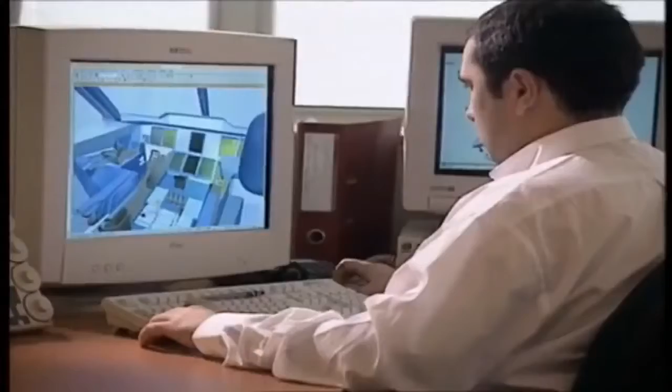It's a mega plane, bigger and heavier than any other passenger plane in the sky. It will hold more people than any commercial jet flying. Designers have spent billions. Now is the moment of truth. Will the world's biggest passenger airliner survive its maiden flight?

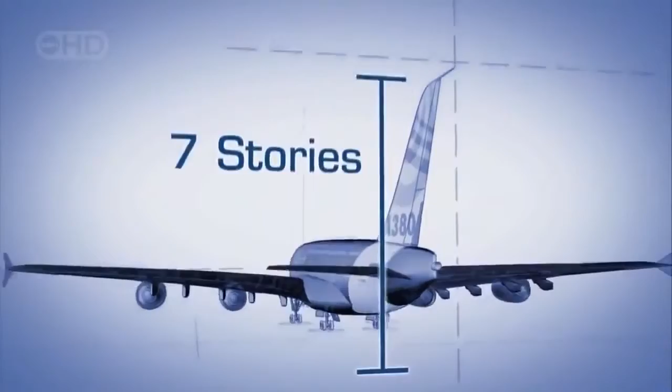An early spring morning, clear skies and a light breeze over southwestern France. Crowding the fields that flank Toulouse International Airport, 40,000 spectators, backpackers, campers and journalists from around the world, all vying for the perfect spot to watch the maiden flight of the Airbus A380, the largest passenger plane ever built. It's 73 meters long, 7 stories tall at the tail, almost 80 meters from wingtip to wingtip, heavier, longer and taller than a 747, with 2 full levels of seating, enough to hold over 550 passengers.

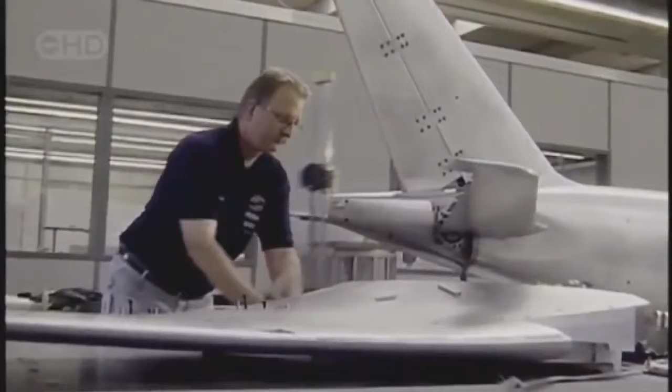Getting this monster off the drawing board required new, super lightweight materials, 4 powerful new mega-sized engines, massive new factories across Europe, and a computerized flight control system more sophisticated than any other in commercial aviation. This moment is the biggest gamble that the company has ever taken. A $12 billion investment, the company's entire future, and the lives of future passengers all ride on the success of this historic test flight.

Alongside the runway, a hush settles over the crowd as the megaplane comes into view. Gradually, it gathers speed, accelerating to reach its takeoff velocity of 269 kilometers per hour. Then, as it nears the end of the runway, the moment of truth. The massive nose tilts skyward. A sliver of daylight appears beneath the rear wheels, and the Airbus A380 takes to the sky for the very first time. The engineers and technicians in the crowd breathe a collective sigh of relief. Their baby is flying.

The question now is, does anyone want a plane this big? Will the unprecedented size prove a boon or a boondoggle? Is this super jumbo the future of commercial aviation? Or the biggest white elephant since Howard Hughes built the Spruce Goose? It all depends on whether Airbus can convince airlines that travelers will want to trust their fates to this flying cruise ship.

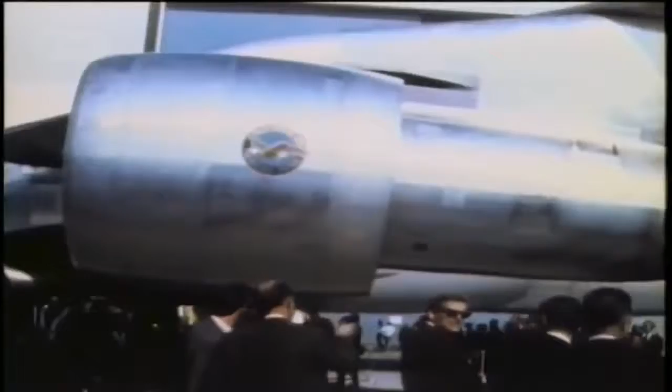1969 was a year of technology firsts. That year saw the arrival of 2 exotic new airliners. Boeing rolled out the 747, the first double-decker passenger plane, larger and heavier than any other. Powered by 4 Pratt & Whitney JT9D engines, providing a total of 186,000 pounds of thrust, the plane had enough power to carry more than 400 passengers and their baggage, more than double the capacity of the 707. The plane wasn't an immediate hit, but eventually, it took off.

That same year, Aerospatiale and British Aircraft Corporation, the precursor to Airbus, introduced the Concorde. While Boeing was bulking up, Europeans were getting small, but very fast. The Concorde traded capacity for speed. The plane carried only 128 passengers, but it could cruise at twice the speed of sound, cutting the trip from New York to London from almost 8 hours to just under 3.5. Both the 747 and the Concorde came to be the epitome of luxury in air travel.

These two differing visions came to symbolize a fierce rivalry between American and European aerospace giants, a rivalry that's only intensified with time, even as the business of air travel has changed dramatically. The Concorde, after years of financial difficulties and a devastating crash in Paris, has been grounded. And the 747 is now an aging workhorse, noted less for style and more for the sheer number of passengers it can pack between its wings.

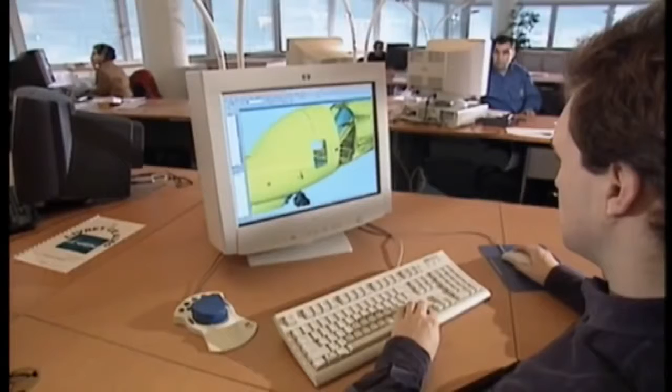Some argued that such a craft would be far too heavy and expensive to be practical. But a tenacious and aptly named Airbus executive, Charles Champion, wouldn't take no for an answer. He encouraged his design team to think outside the box.

Well, there were lots of weird designs. Some looked at the double bubble, a double-wide fuselage. One of their first ideas, it looked promising, but computer analysis showed that it would be far too heavy and not sufficiently aerodynamic.

So Champion sent his team back to the drawing board, and eventually they came up with this history-making concept: a full-length, double-decker passenger cabin, with a third deck below for cargo. Space-wise, it's the equivalent of 2 complete wide-body cabins, one on top of the other.

The new plan called for an aircraft only 2.5 meters longer than Boeing's 747. It was 15 meters wider and 5 meters taller.

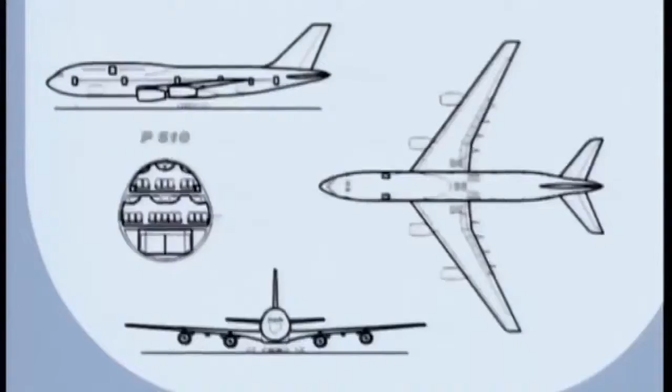But when they ran the design figures through the computer, they had a shock. The plane was far too heavy. We came up with horrid figures, saying, my God, this is the weight of the aircraft, it doesn't work.

So what we did immediately at the launch of the program, or 2-3 months afterwards, we launched a very strong challenge on the weight. The team set out to bring the base weight of the aircraft below 277 tons. That's only about 50% heavier than the 747.

An ambitious goal for a plane designed to carry over 100 more passengers and their luggage halfway around the world. Unless Champion and his engineers could find the means to beat that target, the dream would die.

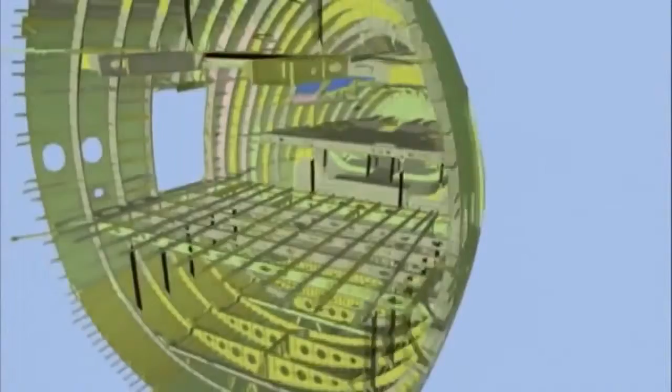Airbus engineers were faced with a design challenge that called for a lightweight plane carrying over 550 passengers at a lower cost per seat, not to mention quieter and less polluting than anything in the air. The design team knew they would have to rethink everything.

They needed lighter materials, more powerful engines, larger wings, even bigger and smarter factories. Every component would have to be scaled up from supersize to mega size.

But even while the engineers were still scratching their heads over the details, the Airbus sales force was already hard at work, seducing customers with visions of the future.

They created a full-sized interior mock-up that promised passengers in coach some relief from the grind of travel, with seats an inch wider than in other planes, and overhead bins 10% larger.

Each plane can also feature a new interior illumination scheme to eliminate the upsetting effect created when flight attendants suddenly switch on overhead lights. The kinder, gentler system in the A380 mimics the gradual transition from day to night and back to daytime again.

These and other innovations make the plane distinctive, but it's the promise of opulent luxury that really turns heads. To help build excitement, computer programmers constructed a virtual showroom where airlines can bring to life their wildest design fantasies.

Ladies and gentlemen, this is your captain speaking. I'd like to welcome you on board this 3D tutorial for the A380 main deck door.

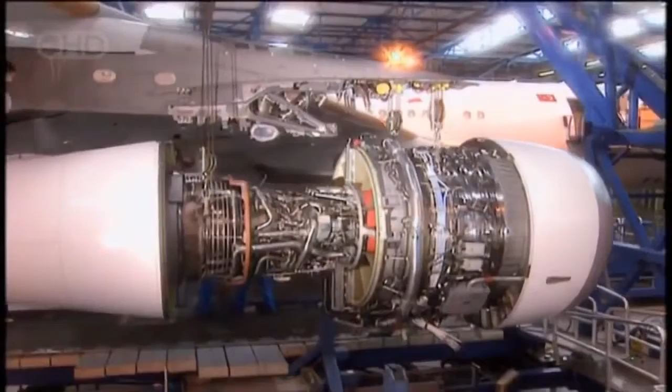For power, they would buy engines built by Rolls-Royce, capable of providing 30% more thrust than the engines used on the 747. Each massive power plant cost $15 million, as much as a ton of gold. Altogether, they account for almost 25% of the cost of the entire plane.

If there's one thing this aircraft needs, it's thrust that won't quit. Each engine provides up to 80,000 pounds of force. Running at top speed, this mega guzzler sucks down a litre of fuel every second.

The A380 is designed for routine flights lasting 13 hours or more. That means when it's fully tanked for takeoff, the A380 carries a lot of fuel—260,000 litres, 20% more than the load carried by the 747.

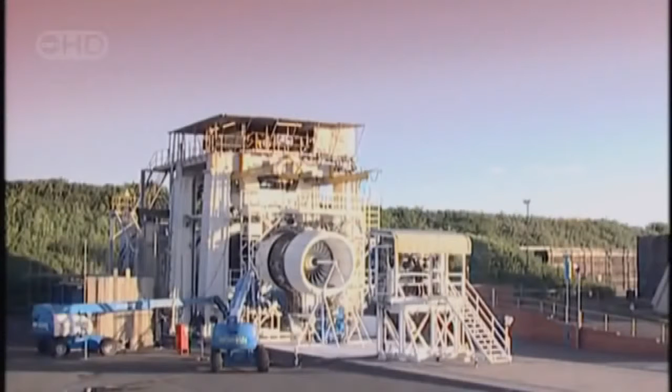Just imagine what would happen if anything threatened the integrity of one of those fuel tanks, like a catastrophic engine failure that sends shards of metal tearing through them. That's the nightmare that haunts engineers at Rolls-Royce, and they're about to destroy an engine to make sure it never occurs.

These 24 titanium fan blades suck air into the maw of this A380 engine. Each blade is 1 meter in length and weighs 15 kilograms—lightweight, but super strong.

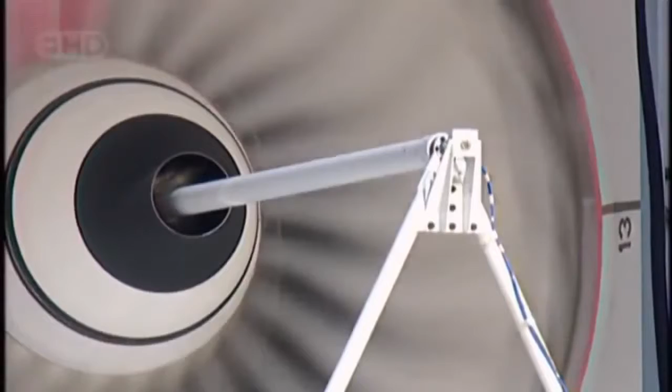When the engine is roaring along at full throttle, the blades spin at almost 3,000 revolutions per minute. The centrifugal force at the tip of each blade is equivalent to the weight of a 110-ton locomotive. If one of these were to break off and escape into the engine, it could wreak unimaginable destruction to the plane.

That's why Rolls-Royce engineers are about to conduct an engine failure test. They're going to intentionally cause one of the fan blades to break off at full speed in order to prove that the engine enclosure can contain the damage without letting any metallic fragments escape.

In the process, they will totally trash this $15 million engineering marvel, a small price to pay when the lives of over 550 people could be at stake.

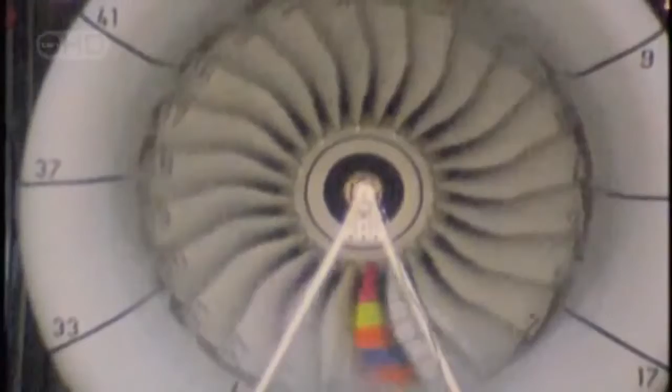A super slow-motion camera captures every moment in excruciating detail. The blades are striped to make visual measurement easier. When the fan is spinning at full speed, engineers send a signal to explosive bolts at the base of the multicolored test blade. Faster than even this camera can see, the knife-like piece of metal shears off and flies into the engine mechanism, wreaking havoc, but no fragments escape.

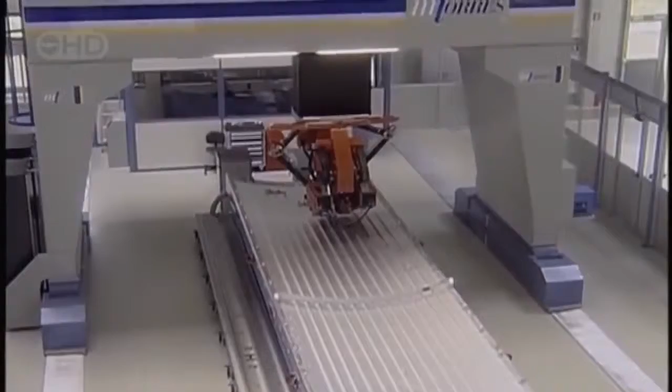The A380 engines are safe for flight, but there are many more pieces to the puzzle. Every other major component would have to be designed from the ground up.

Luckily, Airbus has already turned the world into a giant mega factory, with 1,500 suppliers and facilities used to build its existing planes, scattered over 30 countries, yet tightly linked by an advanced communication and transportation network.

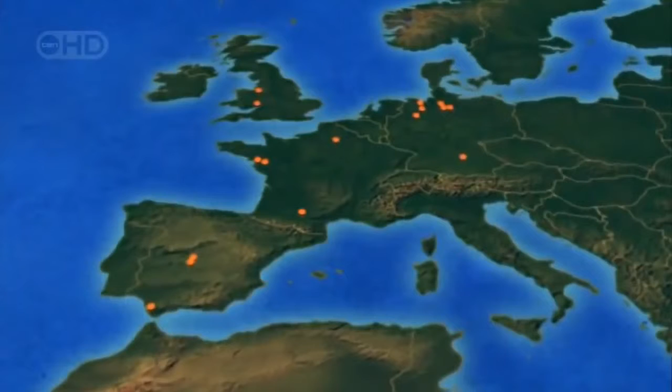To assemble the hundreds of A380s the company hopes to sell in the coming decades, planners settled on 5 countries to build the major components: wings in Wales, engines in England, the fuselage and vertical tail section in Germany, the horizontal tail section in Spain, and of course France, where all the pieces came together to assemble the finished plane.

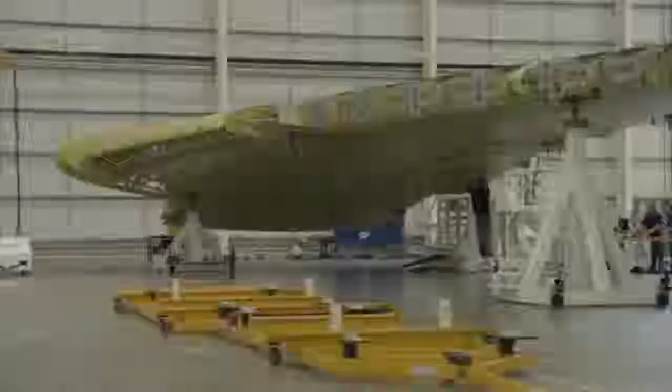The process begins in Wales, in 2 huge new wing factories, built to assemble the largest and most structurally complex commercial airplane wings ever designed—32,000 components, shipped in from every continent except Antarctica.

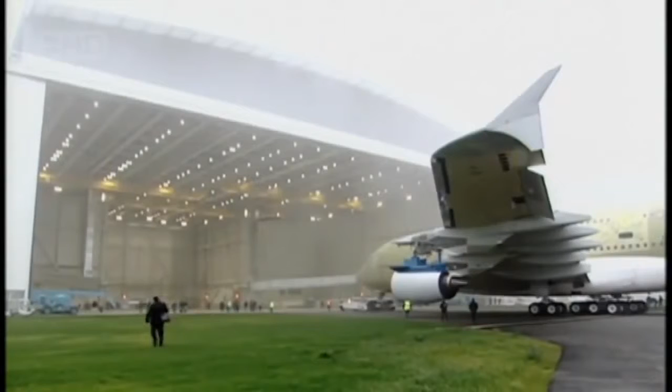The wings on the A380 are true mechanical marvels. They provide flight control and enough lift to carry the fuselage, plus the 4 supercharged engines, each weighing nearly 6.5 tons. And with 260,000 litres of fuel loaded inside 10 interior locations, the wings are also flying fuel tanks. They're one of the most critical structural components in the entire aircraft.

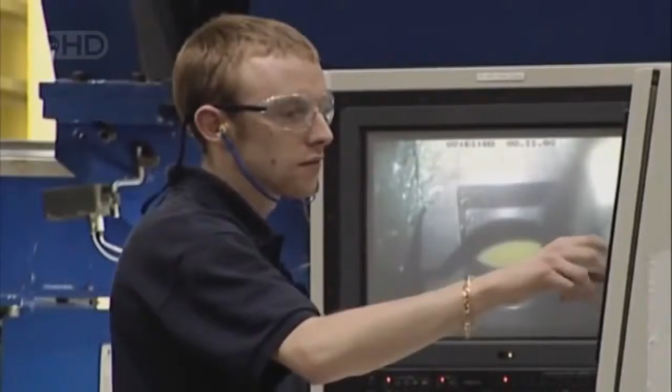The precision construction process begins with sheets of aluminium, destined to be shaped into the 10 panels that cover each wing. Each piece has its own shape and weight requirements. To whip one up, just follow 3 not-so-easy steps: shave it, wrap it, then bake it.

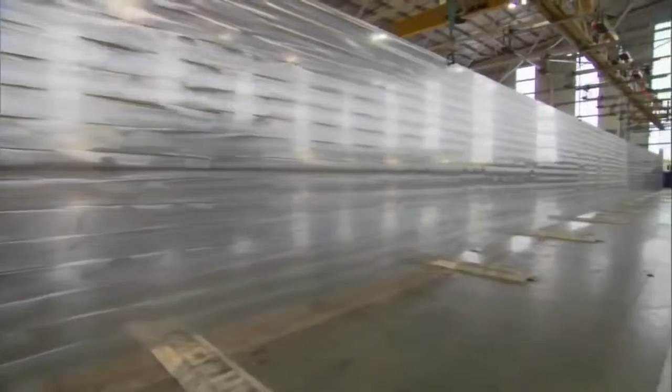This 34-meter-long slab of aluminium weighs in at 5 tons, way too heavy for the wing panel it's destined to become. In its final form, it will weigh close to 1 ton. So off it goes, to get the aerospace version of a tummy tuck. Overhead cranes use 32 powerful suction nozzles to lift and transport each aluminium slab.

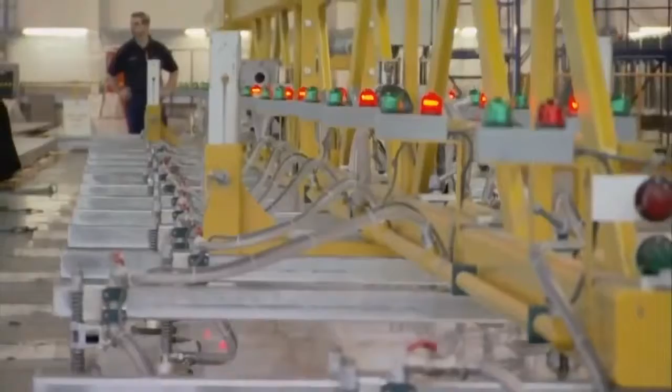Tim Fernifer carries the burden of responsibility. Using a remote-controlled steering device, Tim guides the 5-ton piece of metal across the factory floor, but he can't do it alone. His team must watch the motion of the wing panel throughout the ride.

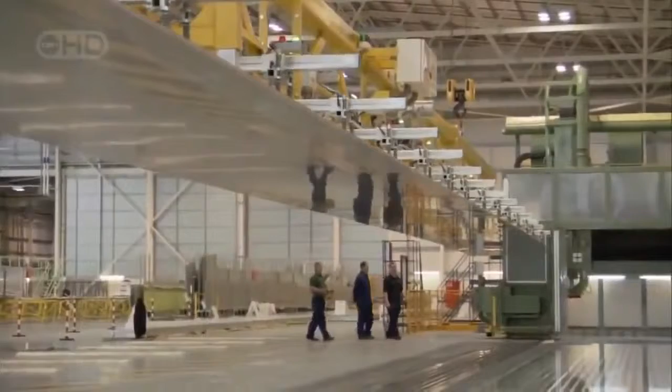You've got to be particularly careful when I'm handling it. I can't see down the other end, so I need another pair of eyes down the other end. It's just health and safety issues. You have to watch, make sure everybody's out of the way when it's actually moving.

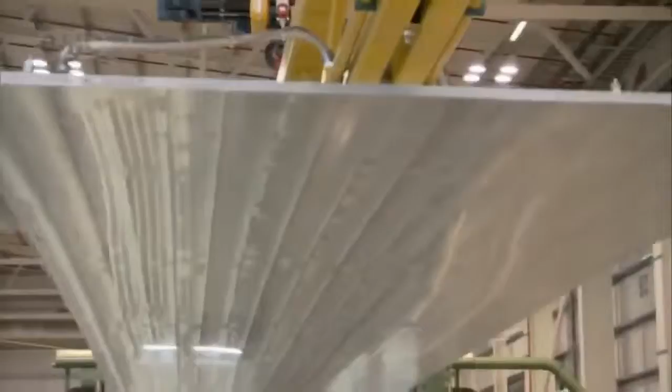It's a dicey ride across the factory floor before the huge sheet can settle safely into position. A milling machine 40 meters long. Like an oversized cheese grater, the precision cutting head slowly cuts back and forth across the surface of the wing.

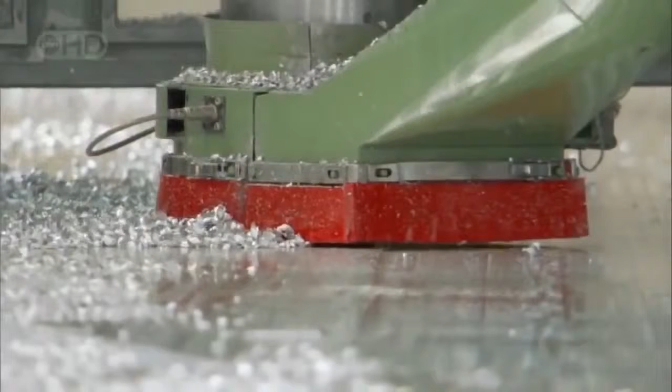Painstakingly shaving the aluminium until the panel shape matches the 3D contour map stored in the machine's computer. The process takes up to 3 days. It eliminates 75% of the panel's weight while maintaining its strength.

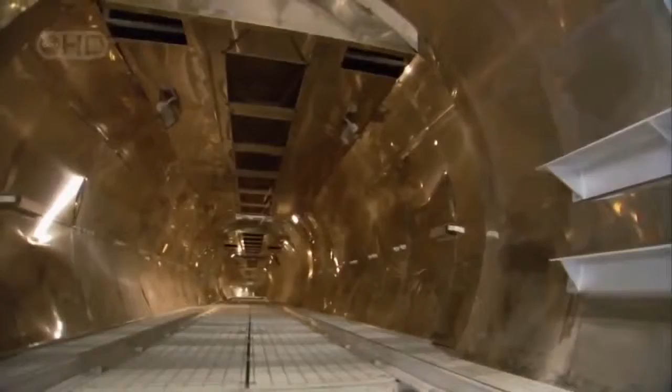Then it's ready for the oven, one of the world's largest pressurized heat chambers, 42 meters long, almost 6 meters wide. Technician John Massey has cooked plenty of wings for smaller Airbus planes, like the A320. It's a challenge to see it go from the size of the 320 to the size of the 380. It's a huge, huge jump.

The A380 wings are 50% larger than A320 wings. That means a 50% greater chance of error in this critical process. Baking requires careful setup.

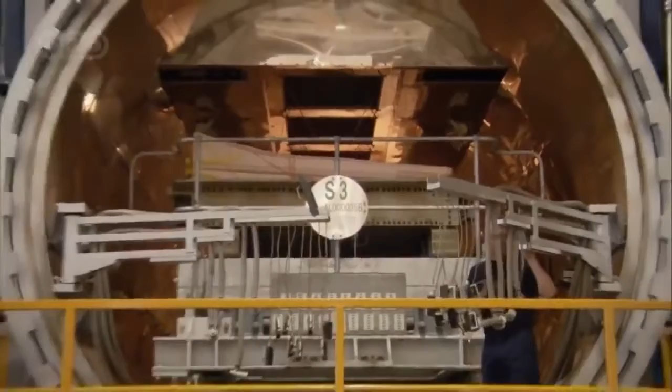First, Massey and others place the segment in a special metallic form. Then they vacuum seal the entire assembly with a massive piece of plastic shrink wrap to protect the metal from contamination. Inside, the heat must be uniform across the entire panel, 150 degrees centigrade, with no room for error.

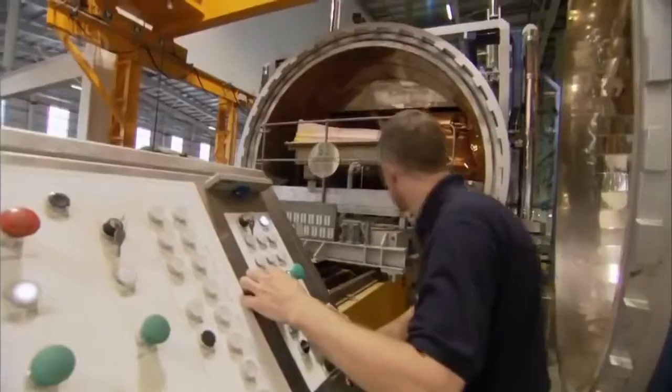We try to avoid any changes in the vacuum or the temperature, so the temperature must remain constant right throughout the process. It must maintain within 3 degrees. Otherwise the run is invalidated. After 24 hours, the panel is ready.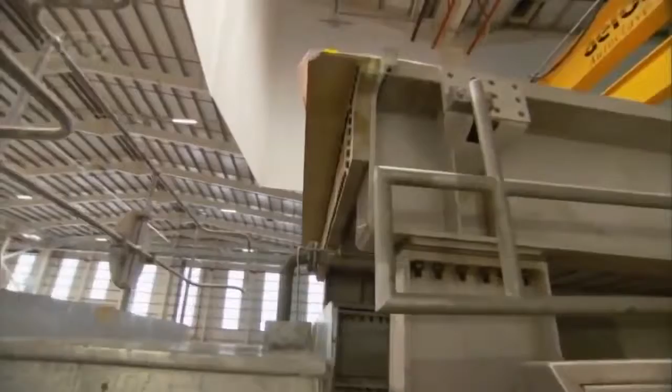Specially equipped vehicles rise up and move into place in front of the oven. All eyes are on the plastic protecting the wing panel. If it breaks, the aluminium wing piece is compromised. A disaster. The entire wing panel would be worthless.

If the bag bursts, it means starting the job again from scratch. Anxiously, they scan the surface for any breach. At last, the wing is cool enough to touch. And good news, the bag appears to be intact.

Finally, the wing segment arrives in its docking bay. Here, the technicians first remove the plastic and cloth wrap. Now begins the tedious search for flaws.

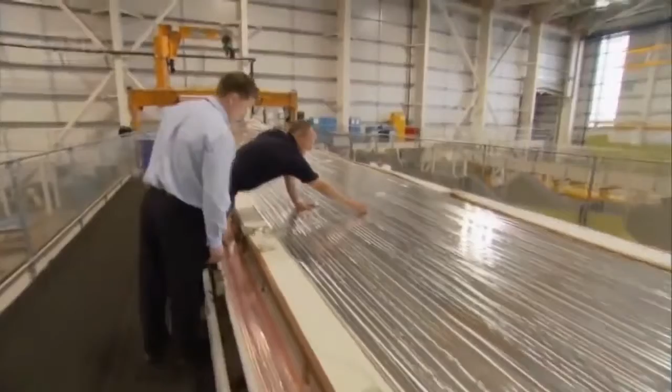John's boss, Gareth Williams, arrives to inspect the piece. He retrieves small metal rods that were baked onto the top of the wing panel. Each of these cylinders tells an important story about future safety.

These are test pieces which are made of the same material as the wing panel, and we use them to confirm that the heat process that this part's just gone through is correct and it's to the right specification. When this testing phase is complete, Gareth and John get the okay to move the wing to its next destination.

The nearby wing assembly plant, an enormous brand new factory located just up the road. It's one of Britain's largest industrial buildings built in this century. It's nearly 85,000 square meters in area, equal to 12 full-size football pitches.

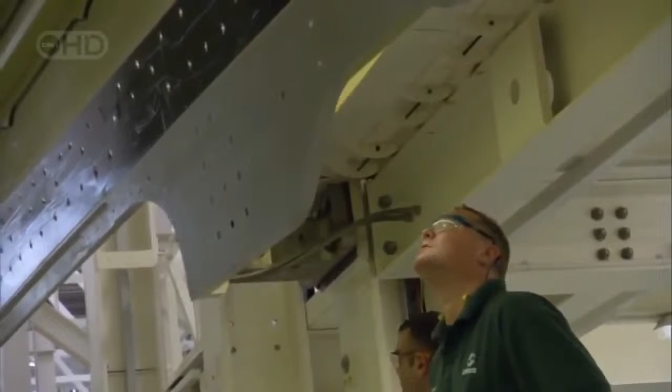This is where the builders attach the aluminium skin panels to the wing skeleton. George Lee guides his team through the tricky assembly process. Today they're preparing to lift and place one of the largest of the 10 aluminium panels, 34 meters long and weighing in at more than 1 ton.

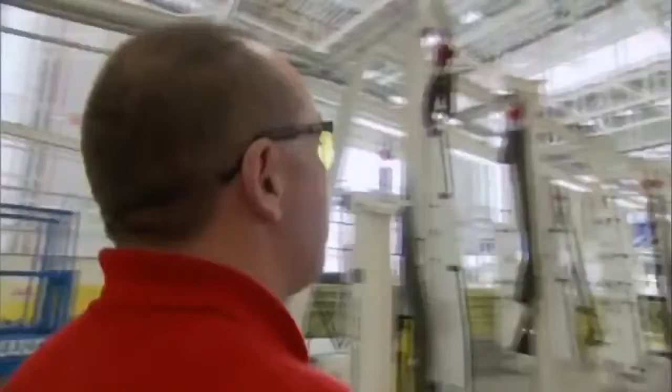Size is a great challenge because everything requires some form of overhead lifting. Nothing can be lifted manually, so virtually everything requires overhead craneage movement, and therefore the management of the craneage system is very, very important. The panel hangs like a huge guillotine, suspended over the factory floor.

But that's not all that's hanging over the assembly team's head. Time is running out. Along the edges of the partially constructed wing, builders have applied a sealant that'll help to ensure the integrity of the fuel tanks. The sealant dries quickly within hours.

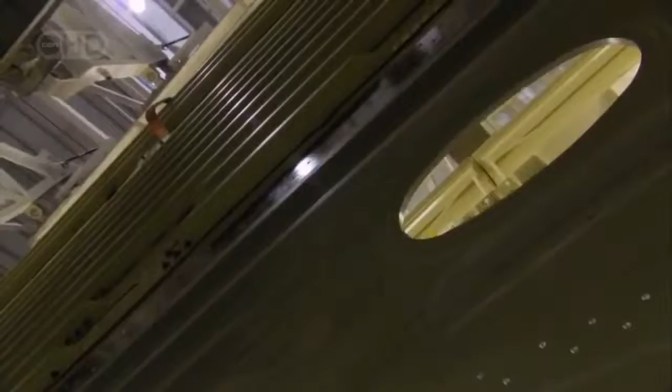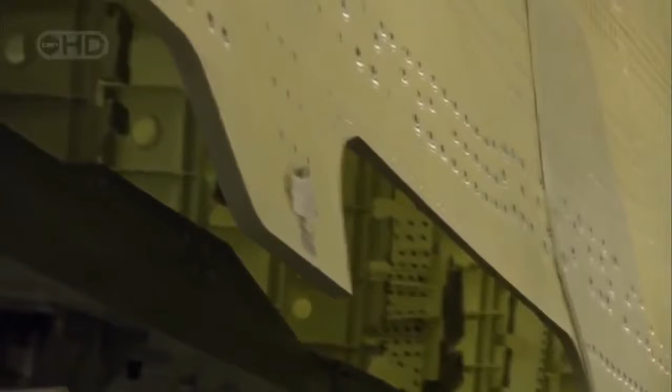The team must fit the wing panel into place before the sealant dries, or the wing could be defective. This time they're cutting it close. The only concern I've got is the time factor. If they don't succeed, the team will have to scour the sealant off the aluminium surface and start the whole process again.

Finally, the panel settles into place. 1 down, 9 to go.

It can be stressful, yeah, it can be stressful. At certain times it's an enjoyable job, because when it actually all works and goes together, it's quite enjoyable. You've made it an achievement.

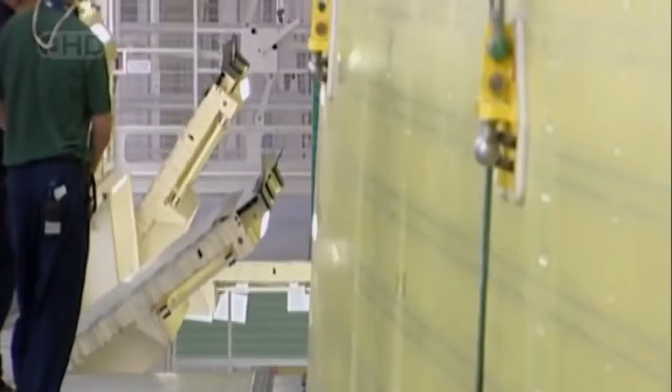Now it's time to glue and bolt together the pieces, like building the world's biggest model airplane wing.

This part of the process remains a carefully guarded trade secret. The company wants our cameras off. No cameras.

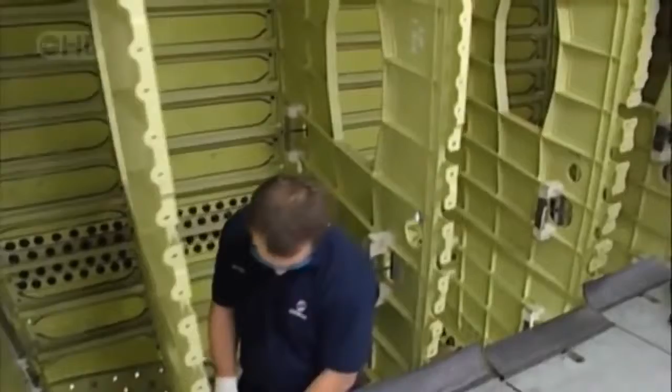The secret assembly process inside the jig will take nearly 4 weeks to complete, but it takes more than a wing to make a plane.

All across Europe, more factories are coming online, pumping out body parts of this giant Frankenplane. But not everyone is happy to see this kind of progress. Some locals in Germany are up in arms over Airbus's ambitious plans.

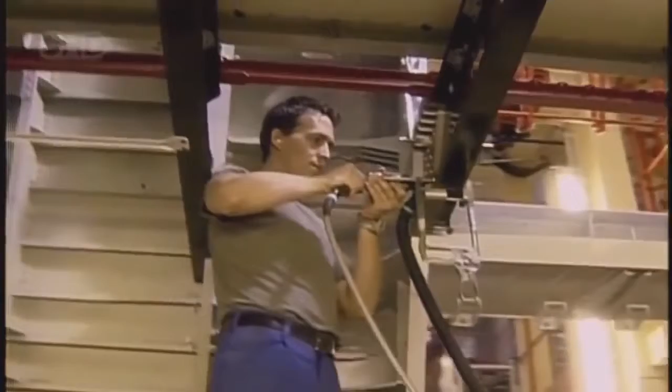This is the newest Airbus factory in Hamburg, a megastructure big enough to house 4 A380s side by side. Airbus has been building airplane fuselages in Germany for more than 30 years. But with the announcement of the A380, the company needed to massively expand the site and send finished planes here to get fitted out on the inside and painted on the outside.

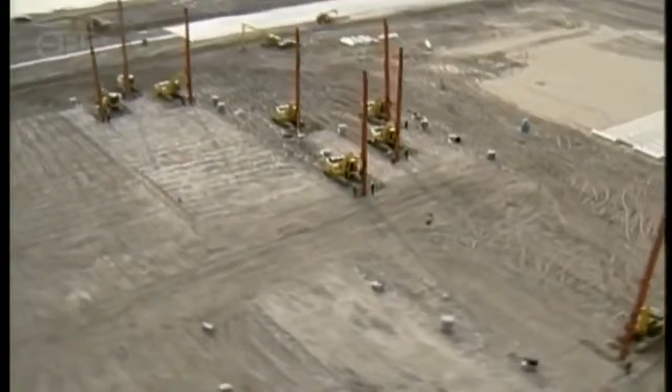No matter what the customer wants their plane to be, a 550-seat cattle car, a high-class hotel in the sky, or even a heavy-duty freighter, this is where the seats, the carpets, the stairs, and yes, even the bar and the waterfall will all be installed. The expansion plan called for 3 new buildings and a longer runway to accommodate the massive plane, but there was a problem.

Airbus's main factory here sits alongside Germany's Elbe River, smack in the middle of Europe's largest tidal wetlands. It's a very special area because we have there the influence of water from the country and tidal water from the sea, so we have a mixture of sweet water and salt water. This fragile ecosystem is home to 70 species of migratory birds. Now 71 if you count the Airbus A380.

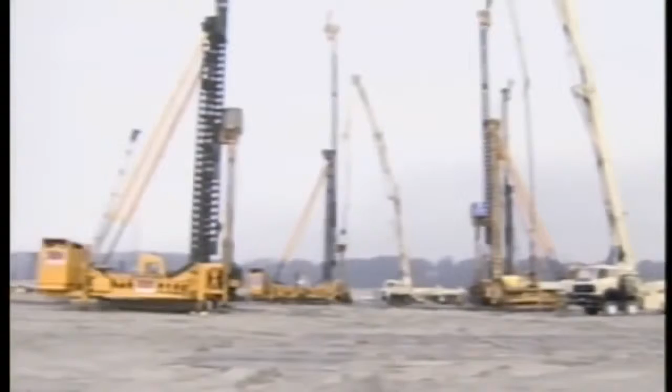Airbus wanted to fill in 140 hectares of pristine wetland, and local activists cried foul. A pitched battle in the courts and demonstrations in the streets delayed construction of the factories for over 2 years. But eventually, local and national politicians who wanted to bring business to the community intervened.

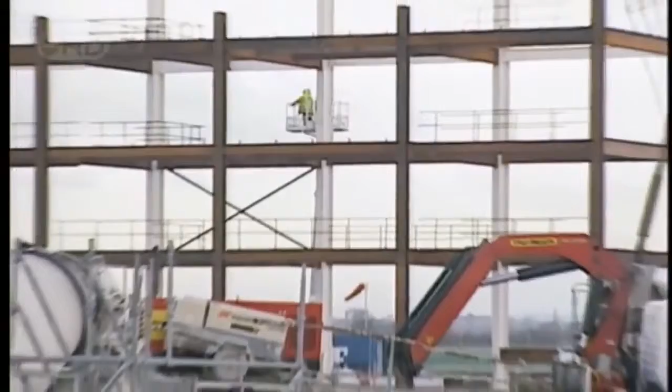The factories went up. One got busy building fuselage segments, but the other 2 stand nearly empty. More lawsuits still block the Hamburg facility from taking delivery of all of the planes it's meant to finish. Unless the company wins in court, it may have spent a few hundred million dollars building a factory of little use.

The problem lies with the runway. Airbus needs a longer runway to accommodate a heavy-duty cargo version of the A380. We need the runway extension in Hamburg for the pilot to test the performance of the aircraft, and he can only test this when he has an aircraft with a weight approximately the weight you normally have in cruise altitude on a normal scheduled flight.

That plan to lengthen Hamburg's existing runway has met with considerable resistance from locals. Their concern: extending the runway will bring the tarmac to within just 450 meters of village orchards, and uncomfortably close to a Lutheran church that houses a priceless organ built in 1688.

A delicate instrument that could be damaged by ground vibrations and wake vortices, turbulent bands of air similar to miniature tornadoes. We have very precise information on the generation of these wake vortices, these small tornadoes, wind generated by every aircraft, which can affect buildings and also persons close to the runway or close to the flight path. We have predictions that we should expect occasionally winds up to Beaufort 12, about 130 kilometers per hour in the core, and these tornadoes will hit the church tower and the roof construction.

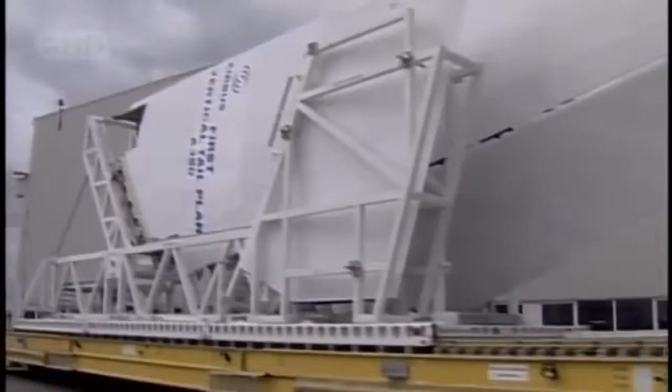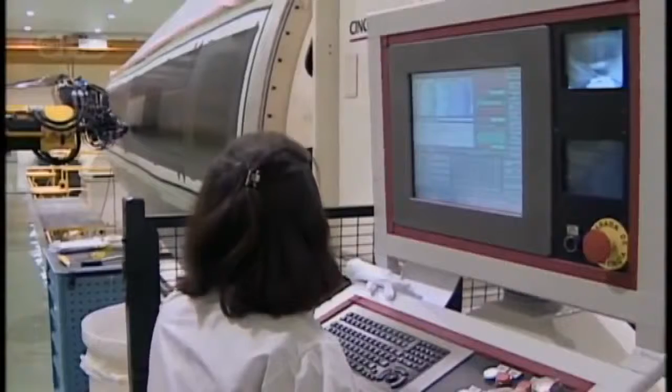But just 57 kilometers away in the town of Stade, another big gamble is underway. The company is using a futuristic material to build the largest commercial aviation tail fin in the world. It's called carbon fiber reinforced plastic, made out of the same stuff that gives diamonds their incredible strength. Carbon fiber is 6 times stiffer than steel and much lighter. It's the only option if builders are going to keep the weight of the plane below the target of 277 tons.

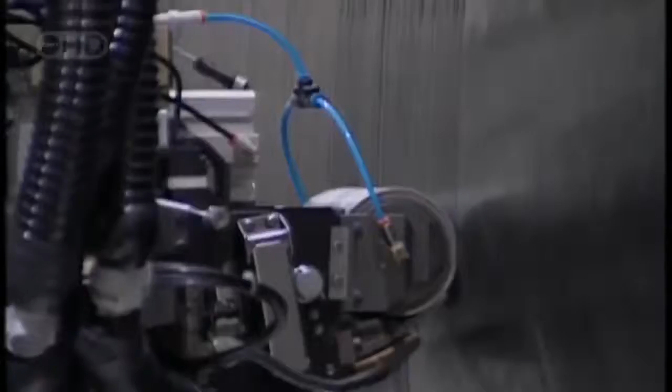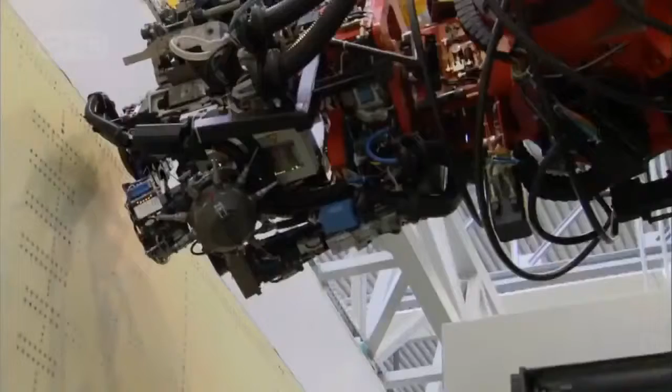Unlike forged metal, carbon-reinforced plastic parts are actually woven, like cloth. Fabricating machines spin out tail panels by combining super-strong carbon fibers with plastic resin to create almost any shape the designers can imagine. After baking, strengthening, painting and drying, technicians join the lightweight panels to the tail skeleton with the help of this computer-controlled riveting robot. Working around the clock for a week, the robot makes 10,000 critical connections with tolerances no human can match.

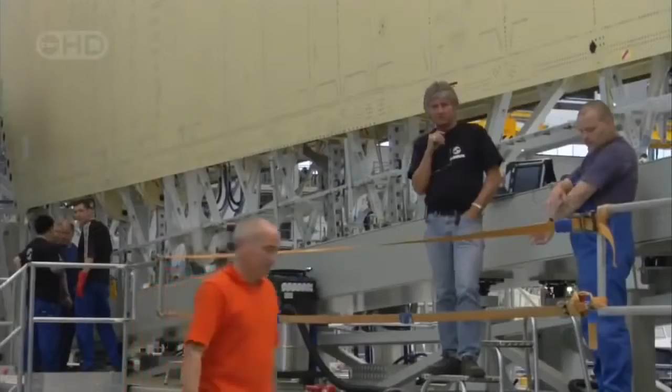The integrity of the tail fin is crucial to the safety of passengers. Airbus engineers know only too well what can happen if a tail structure fails.

It was the second deadliest crash in US history, and investigators made a disturbing discovery. It had been caused when the tail fin and rudder, made partly out of composite materials, sheared off as the plane accelerated. Investigators concluded that cockpit errors, not a failure of the carbon composite material, most likely caused the crash. Builders have applied the lessons of that catastrophe to the tail fin of the A380.

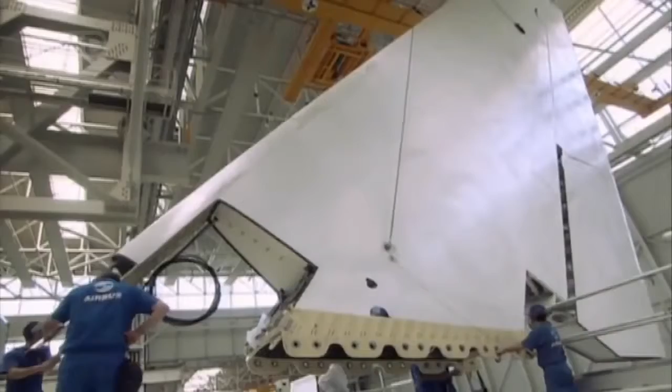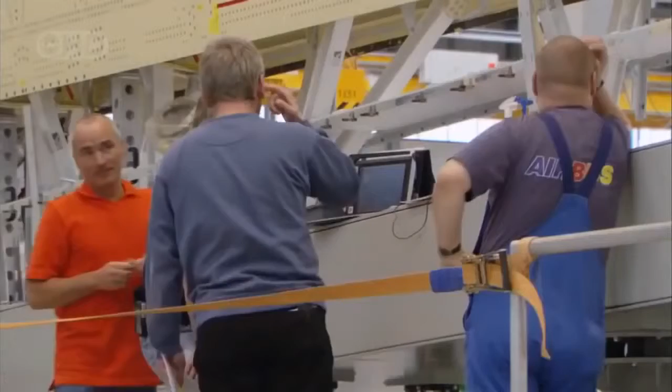But today, something's gone wrong on the factory floor. A lightning strike zapped the power supply, and now the precision riveting robot is dead in the water. We had a storm, a lightning strike. The PC failed and the hard disk was completely gone. Mother Nature has thrown a wrench into the works.

Causing a total crash of the system. It is electricity. Sometimes it happens. Normally we are protected, but it can just happen.

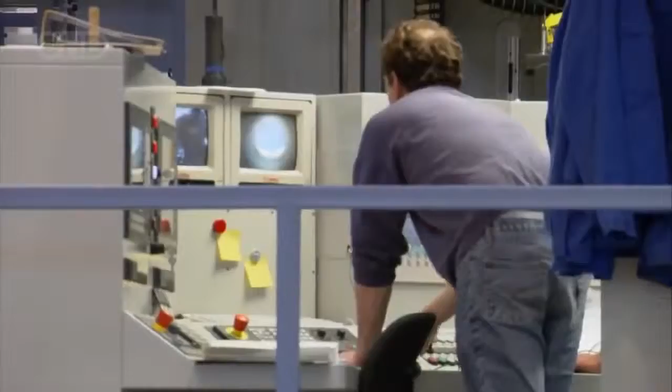Critical hours pass as Kai Baumgartner and his colleagues struggle to get the robot back online. If they can't fix the computer, they can't make the deadline set for finishing this tail fin. Kai and his team must find the problem, and quickly. By the end of the shift, the sound of riveting echoes through the factory once again.

Kai is finally back at work, personally verifying that every one of the 10,000 connections is perfect. A tiny camera positioned on the end of the riveting machine allows Kai to carefully examine each rivet, making sure to catch any abnormalities in the process.

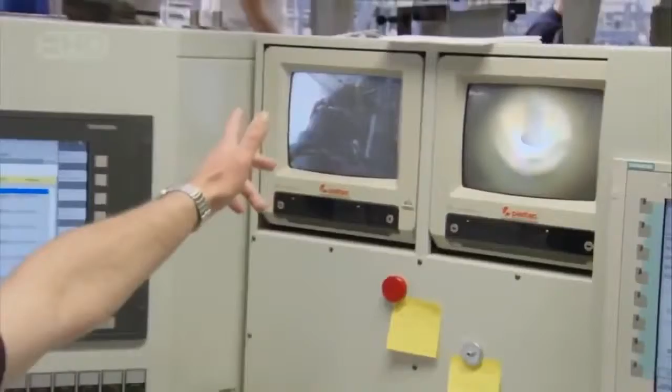I make sure that the drill doesn't get stuck or any mistakes happen. I have my different systems here. It can happen that something is stuck or that an error occurs. It's a repetitive process, but Kai must remain vigilant to safeguard the lives of future passengers.

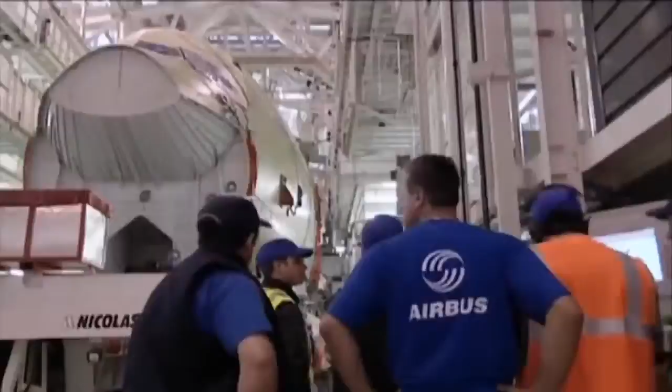Around the world, manufacturers and suppliers are putting the finishing touches on the components of the A380. But putting all the pieces together will be a logistical nightmare. Airbus's existing transport system, the custom-built mega freighter called the Beluga, is too small to haul the A380 components to the assembly factory in Toulouse, France. So builders came up with a risky plan to haul millions of dollars of critical components by water and land.

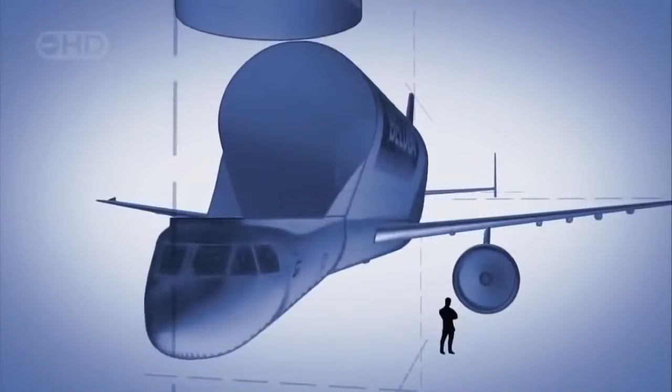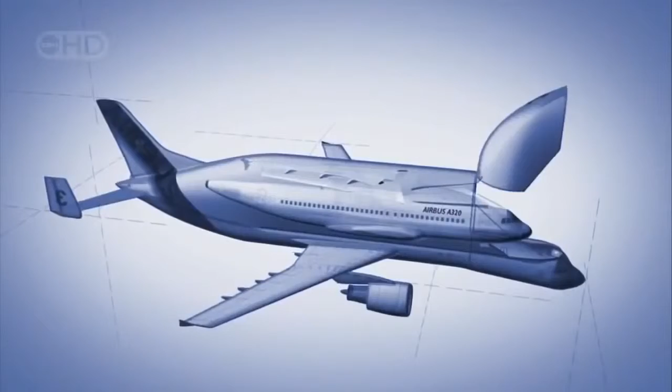Airbus had a problem. They needed to move pieces for the largest passenger plane in the world from factories all over Europe to their final assembly plant in Toulouse, France. For smaller planes, they could use the Beluga, Airbus's distinctive custom-built transport plane. The Beluga's cargo hold measures 7 meters high, 7 meters wide, and 38 meters long, big enough to swallow the fuselage, wings, and tail sections of Airbus passenger planes like the 150-seat A320.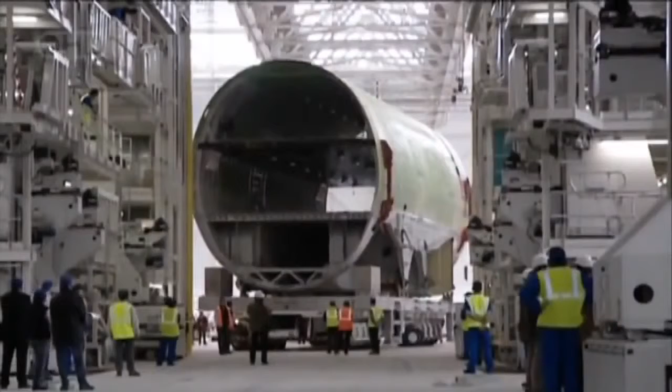But when Airbus decided to build the massive A380, the sheer size of the parts overwhelmed even the Beluga. The Beluga is far too small to carry the A380's enormous double-decker fuselage or its record-breaking wings. So to get their parts to the assembly plants, the company now had to move them by sea and over land, instead of a 2-hour ride in the belly of the Beluga.

Parts for the A380 joined a days-long parade of specially outfitted ocean ships, river barges, and trucks.

Keeping this massive system on schedule is the job of Surface Transport Coordinator Philippe Nedelec, who has to keep it all moving fast. I like to say that I am a kind of conductor. I have to impose the tempo to everybody.

Wings and fuselage arrive by sea in the port city of Pauillac in Bordeaux. From there, it's 96 kilometers by barge down the Garonne River.

It's a tricky bit of navigation to clear the historic Pont de Pierre Bridge, a prized landmark built by Napoleon almost 200 years ago. We have to cross a very old bridge. And at the beginning, the Bordeaux people were very afraid. What these Airbus people are going to do with our nice bridge.

To maneuver beneath the Pont de Pierre, Philippe and his team keep careful track of the tides and the weather. If they don't time their trip just right, if the water is too high or the currents too strong, they could collide with the bridge, destroying precious cargo and damaging a priceless piece of history as well.

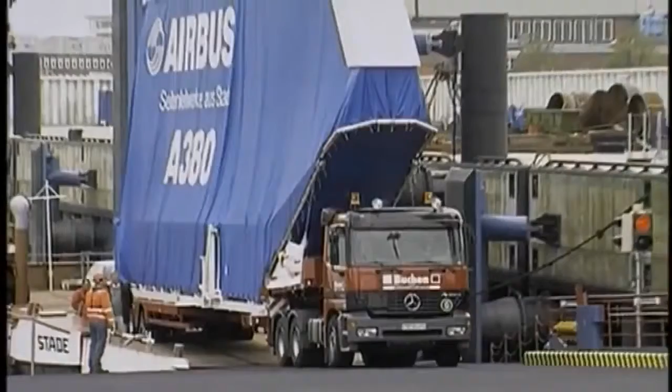Next, it's a handoff to a fleet of trucks and their escorts. Now it's a slow crawl, 16 kilometers per hour for the last 250 kilometers of the journey.

You cannot leave these trucks alone. So you have some trucks for... It's very, very strange.

People are very, very interested with that and very pleased. It's like a show, a permanent show, paid by Airbus.

So far, this roadshow has had an exotic appeal. But will they still be clapping when convoys like this grind through town once a week? Ultimately, that's the pace Airbus will have to keep if they're to meet their manufacturing targets.

At last, the convoy arrives at its destination, the final assembly line, the nerve center of the entire operation. The final assembly line sits on the edge of Toulouse's Blagnac Airport. As with all A380 factories, this one is huge.

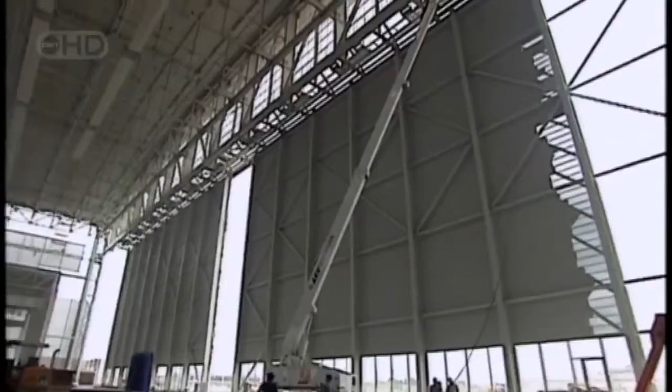500 meters long by 250 meters wide and 15 stories tall. 32,000 tons of steel, enough to build 3 Eiffel Towers. It's in here that the massive plane finally begins to take shape, with the help of a gargantuan assembly structure known as a jig.

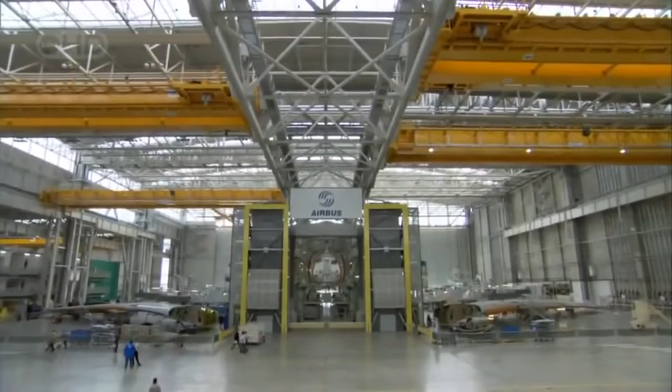According to Julien Pouillou, there's nothing else like it in the world. We're standing in front of the biggest jig that is used in the world to assemble an aircraft. This is the Station 40.

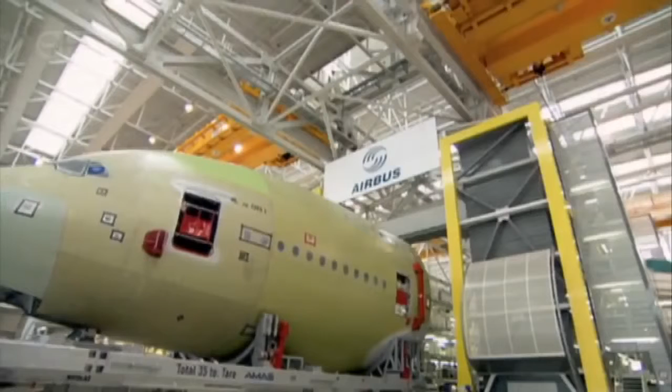Station 40 is where the fuselage, wings and tail all come together. The one-of-a-kind jig stands 5 stories tall, weighs 1,200 tons, and comes equipped with 4 elevators to carry workers to their stations. This is where theory becomes reality, as pieces made all over the world finally come together.

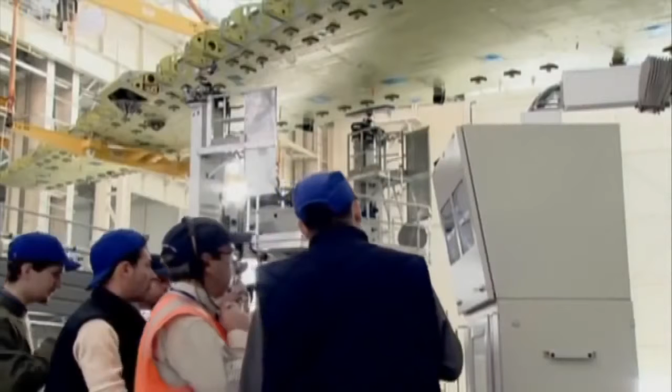If there's been any error, if the pieces don't measure up to spec, or if the joints don't come together just right, within millimeters, the huge passenger craft won't be fit for flying. The lives of future passengers depend on the steady hands of these craftspeople and engineers, working inside the mighty Station 40.

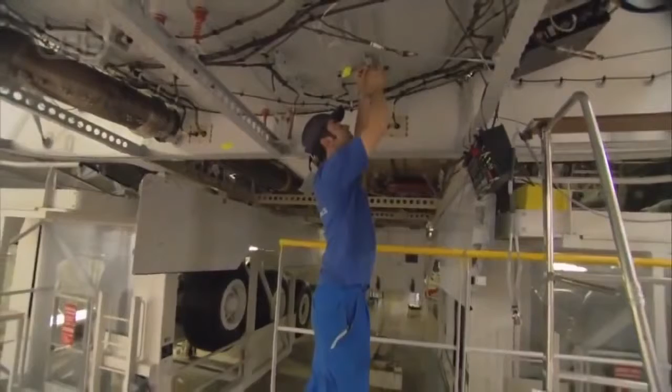The challenge is for us to assemble those pieces together at the same time, because we have a lot of workers working in the same area at the same time, and they have to do all sorts of completely different tasks. One has to take care of the wings and one has to take care of the fuselage, and so they are not doing the same job, but they have to do it together.

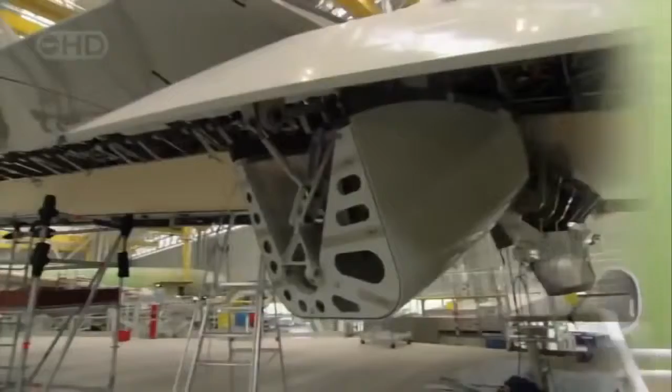Work on this plane now proceeds at an intense pace. It'll take 4 weeks to complete the assembly.

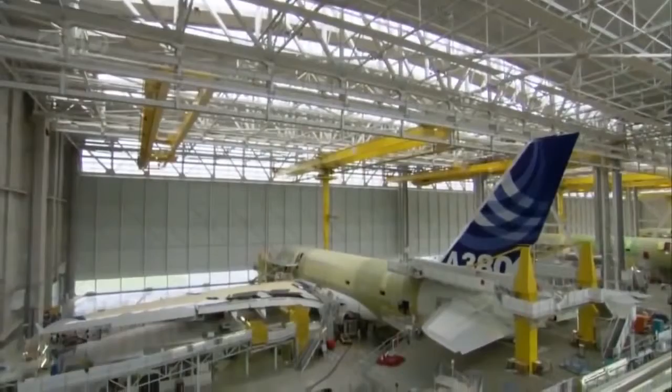Once the plane has been released from Station 40, it moves through a pair of 100-meter wide sliding doors and makes its way to the systems hall. Inside this gigantic space, 3 A380s can sit side by side comfortably, while technicians swarm over the superstructure, testing the electrical, hydraulic and plumbing systems that'll bring the dormant aircraft to life.

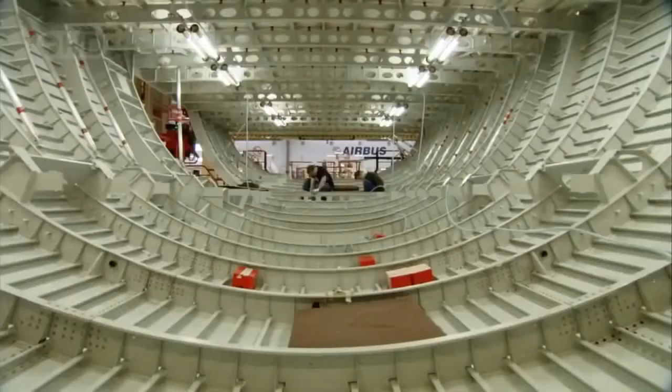Building just one A380 is a massive job, but for Airbus to survive, they're going to have to speed up production to a breakneck pace. Eventually, the Station 40 team will have to crank out a defect-free plane every week.

But before that can happen, the plane must be proven airworthy. Now all eyes are on the skies over southern France, as the gathered crowd wonders, will the A380 survive its maiden flight?

At Blagnac Airport in Toulouse, 40,000 people anxiously scan the skies, searching for some sign of the A380. All flights in and out of the airport are put on hold. The skies over Toulouse are eerily quiet.

Nearly 4 hours have passed since takeoff. If all goes as planned, the huge airliner should swing into view at any moment. But if there's a problem, the flight crew will quickly discover how well their training has prepared them for disaster.

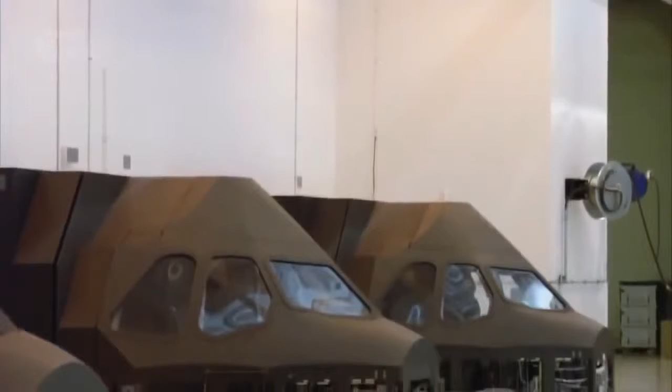Much of that training took place using powerful computers, programmed to mimic the behavior of the A380. That's the theory anyway.

In a simulator like this one, with a computational engine 500 times more powerful than a home video game console, photorealistic visuals help pilots get a feel for the plane. Despite the A380's unprecedented size, Airbus engineers have tried to make it fly like any other airliner.

The task of testing the verisimilitude of the simulator experience rests on the shoulders of pilot Claude Holbeck. I would say that it's exactly as a conventional aircraft, and it's quite amazing because this aircraft is so big and so heavy. This surprised most people, and especially pilots.

One of the most important functions of simulators is to give pilots the chance to flirt with disaster. Very simple: one engine is shut off. This is engine number 4, and look what is happening - the aircraft is just moving slowly on the right side.

It would take a lot more than an engine failure to knock this monster out of the sky. But test engineers are nothing if not imaginative, and they've loaded their simulators with more than 400 different catastrophe scenarios, everything from a fire in the cargo hold to a devastating lightning strike.

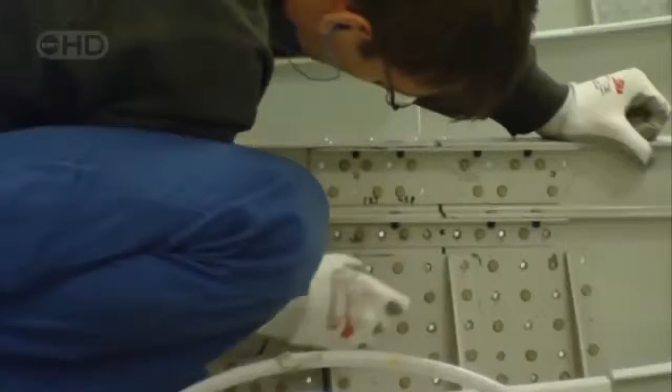At the time of the test flight, Airbus had 154 orders and still needed 96 more just to break even. To fill those orders, they must dramatically increase the speed of production and convince the world's airlines to pay nearly $300 million for each plane.

But even while potential customers were lining up to drool over decor, and the engineering team was still basking in the afterglow of the successful first flight, Airbus surprised the industry when it unexpectedly announced a 6-month delay in the delivery of the first aircraft.

Early customers who took the risk and put down deposits before the first plane had ever been built are not happy. Some analysts believe the plane is still heavier than Airbus promised, but Airbus insists the delay is merely routine. The real achievement will be when the customer says, 'Great, this is what I expected, I love it, give me more.'

If the last 40 years in the history of aviation is any guide, and more people fly further and more often, year after year, then Charles Champion's daring bet may well pay off, and the A380 just might become the flagship of commercial aviation well into the 21st century.